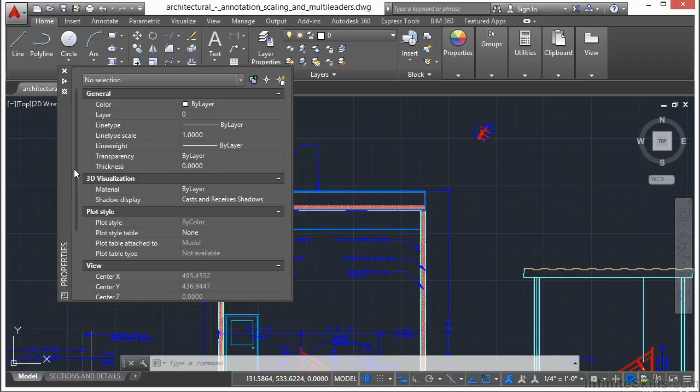If you click on this little button here, that'll auto hide it. And when you mouse over on it, it'll pop up. This little button here gives you different properties that will allow you to move it, to dock it left or right and anchor it, set up some transparency, etc. I typically leave it the way it is, and I typically leave it docked here on the left. So right now I have nothing selected because it says no selection. Plus I know that I haven't selected anything either.

But when I pick something like this object here, it'll tell me what it is. It tells me it's a multi-leader object. And then it gives me general information. That tells me the color, the layer, the line type, etc. Then after the general box, and you have a little scroll bar here you can left click on and drag up and down, goes the miscellaneous section. And that just gives you some overall scale items and some bit of information.

And then it gets more specific. What I mean by more specific is that it has object specific information in it, like for the leader and for the text. It tells you the context, it tells you the leader types, etc. If I scroll all the way down, I can get to even more information on my object.

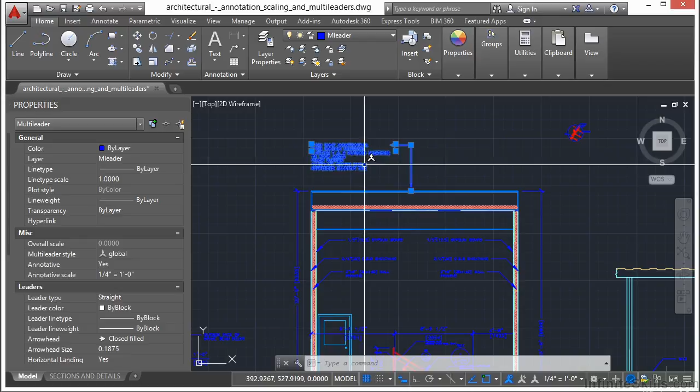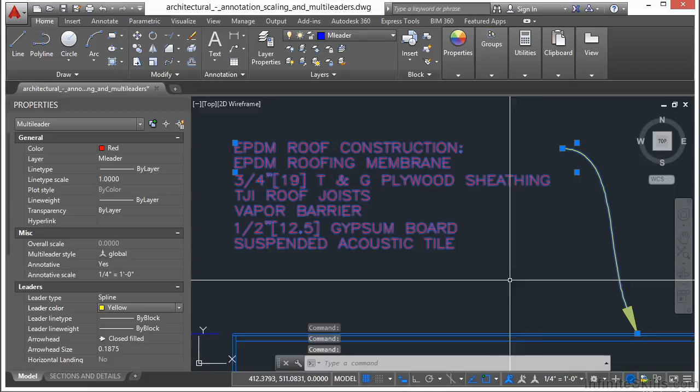Now the really cool thing about the Properties palette is that I can make changes to my selected objects. Right now I have this text selected and its color is set to by layer, but I can change it, as you can see here, to different colors just through the Properties palette. I can also change some of the other options on this. I can change that from a straight leader type to a spline. I can even change the color of the spline. And when I unselect it, I can't make the changes to it anymore, of course.

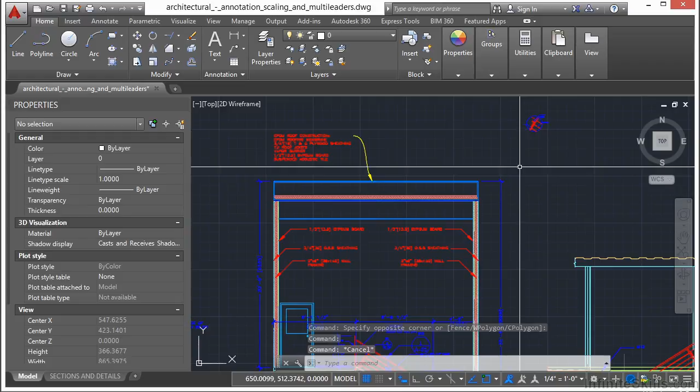And the other cool thing about the Properties palette is that if I select multiple objects, it will tell you how many objects and what type that you have selected. And I can make these changes to all of them at the same time. Now, if you have multiple objects selected that are different types of objects, it will give you just a little bit of information on here, and it will only look at the types of information that they all share. And typically that's going to be what's in the general section. So I can change the color of everything all at the same time. I can change their layers, I can change their line type or their line type scale.

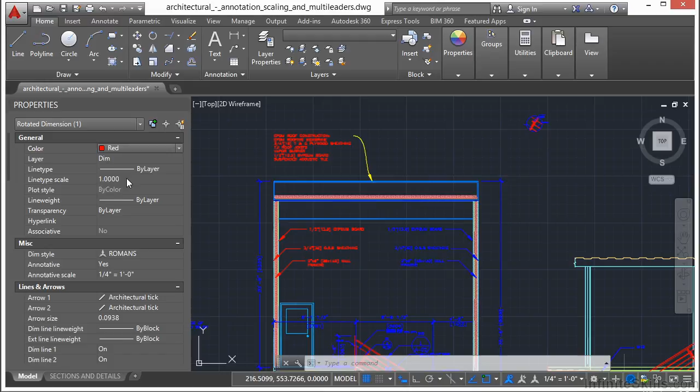Now, if I have everything selected and I want to look at a specific type of object, I can click on this arrow here and it will list how many different types of objects I have of those specific types. So if I want to take a look at my rotated dimension that I have selected, I can. I select just that one option, and I make the changes to it. And only that one object type will be changed. I can go to my lines and I can change the colors of my lines right there, just like that. So you can see you can make a lot of different changes to your objects through the Properties palette.

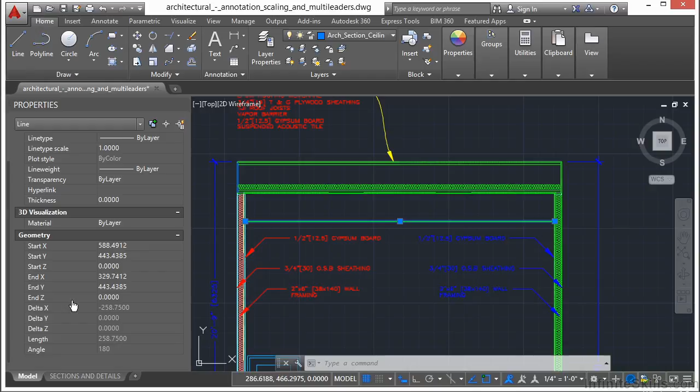I always leave this open all the time on my day-to-day working with AutoCAD because I can do so much with it so easily and so quickly, and it provides a lot of information to me. For example, if I select just this line, it tells me my general information. If I scroll down, it also gives me my length. It tells me what angle it's drawn at, and I can get the coordinates for my starting and end points. If I have a closed object or a hatch pattern or a polyline, polygon, etc., it will also give me the area of that object.